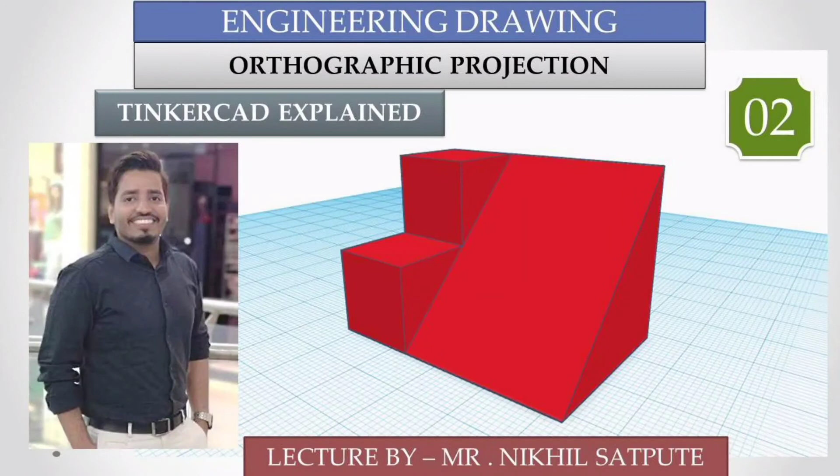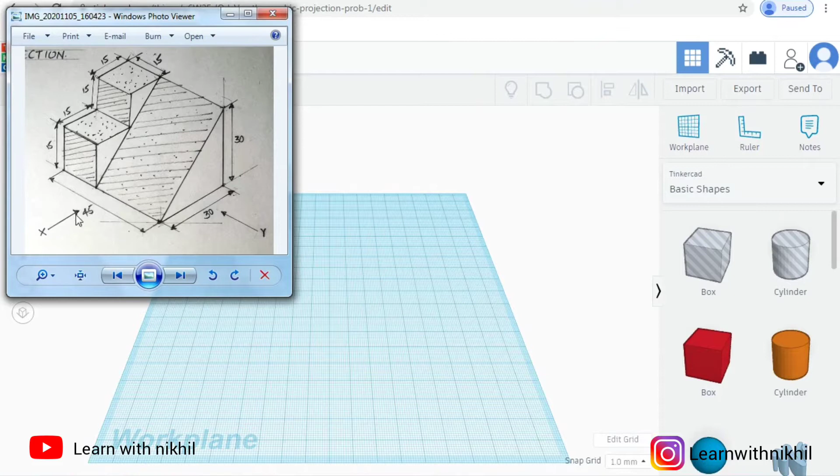Here I have taken my orthographic projection sum number 2 and explained it using Tinkercad software. So first, this is our work plane and this is the three-dimensional diagram which I'll explain you how to draw using Tinkercad software. So first we have to look at its base, width and height.

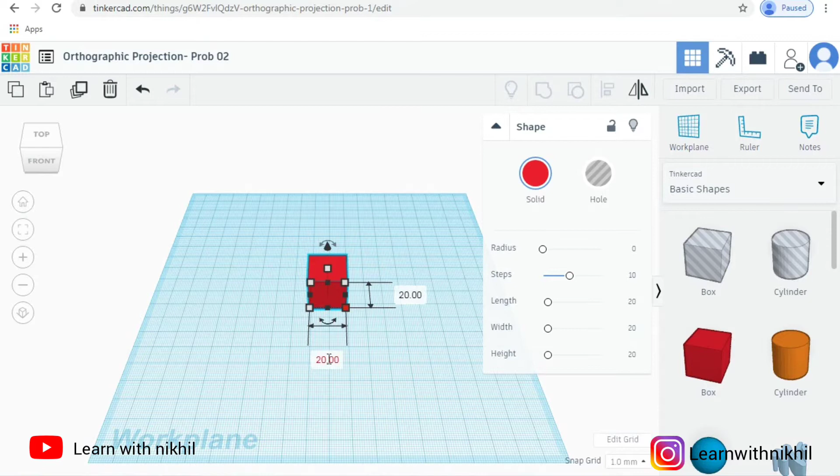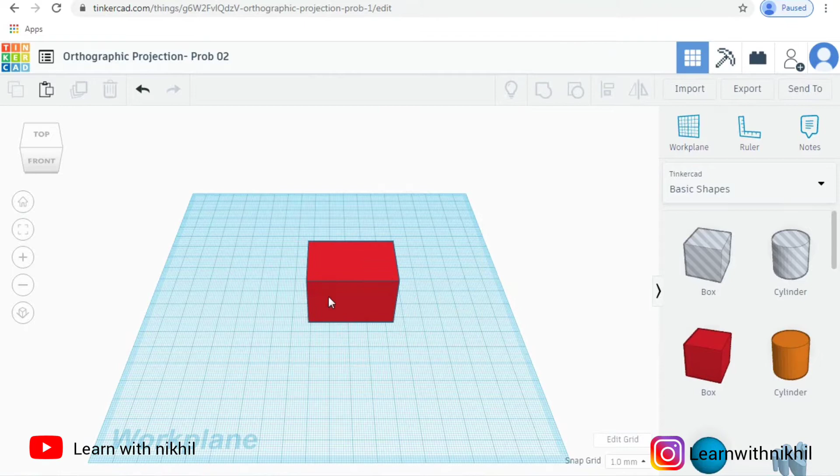So first we will consider this three-dimensional cube or box, and with the dimensions you can see the x direction front view. Width is 45, depth is 30 and height is 30. So with these dimensions, first we have drawn the box with the given dimensions in the question, that is 45, 30 and 30. So this is a rectangular box, which we have made using this Tinkercad software.

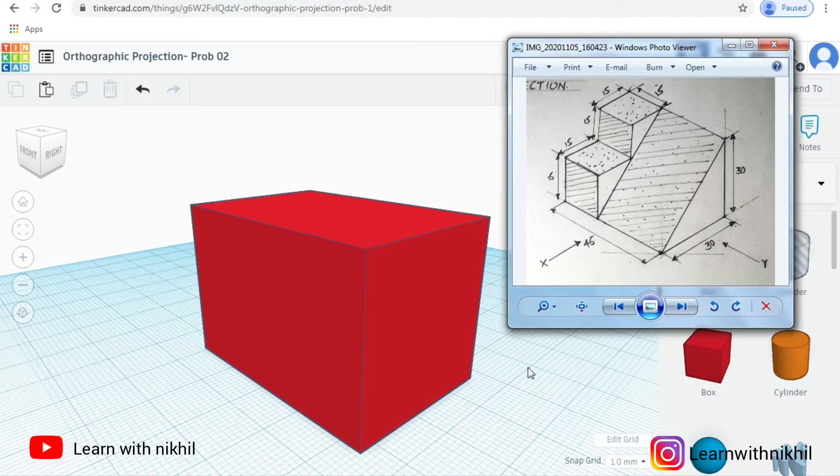Now as you can see, this part is sliced. So we have to cut it diagonally from this part. You can use a triangular shape or you can use a box with double the dimensions. If you are using the triangular, base should be diagonal, but here I am considering the box. This box is a hole shape box, not a solid box. You can convert any shape into a hole shape by clicking on this hole option.

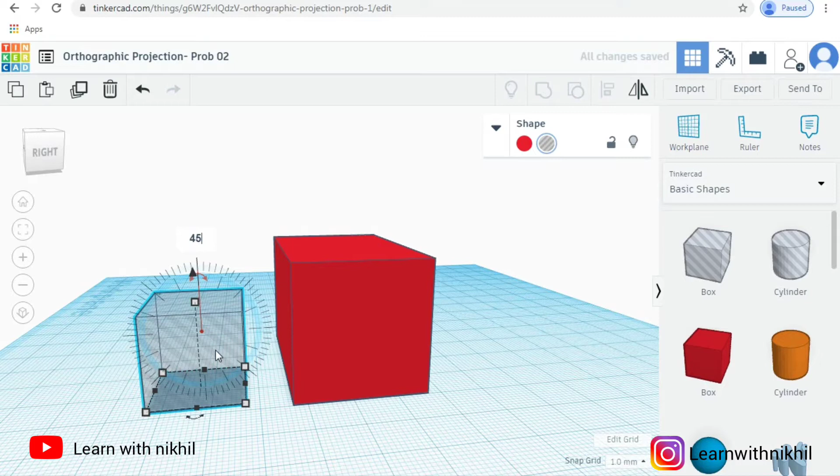I have considered this box. I'll just rotate it at an angle of 45 degree. So clicking on this arrow part, I'll write it here 45, so it will shift to 45 degree angle. Now I'll just increase the dimensions of this box. As the length and height of this box is 30-30, I'll make it double, 60 and 60, so its diagonals will be properly aligned.

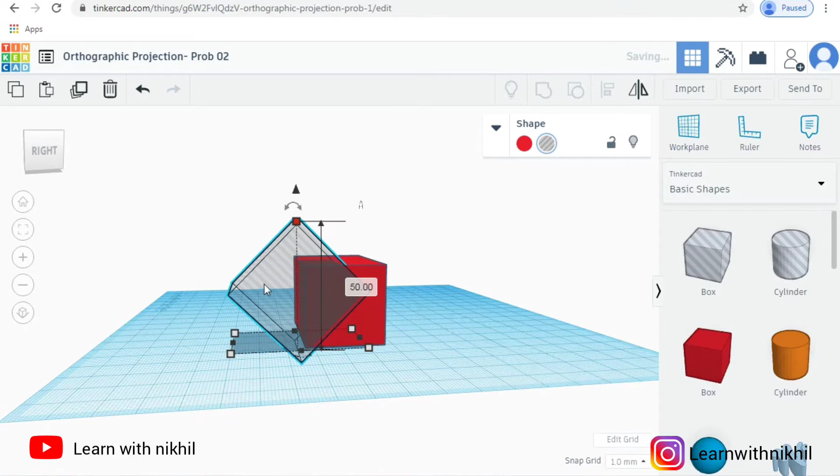Thickness is 30, so that I'll keep as it, and the height and width I'll make it 60, that is double. First you can see I've made it 50, later on I'll make it 60 to perfectly align the diagonal. So this is 30, so I've made the height as 60 of this whole box.

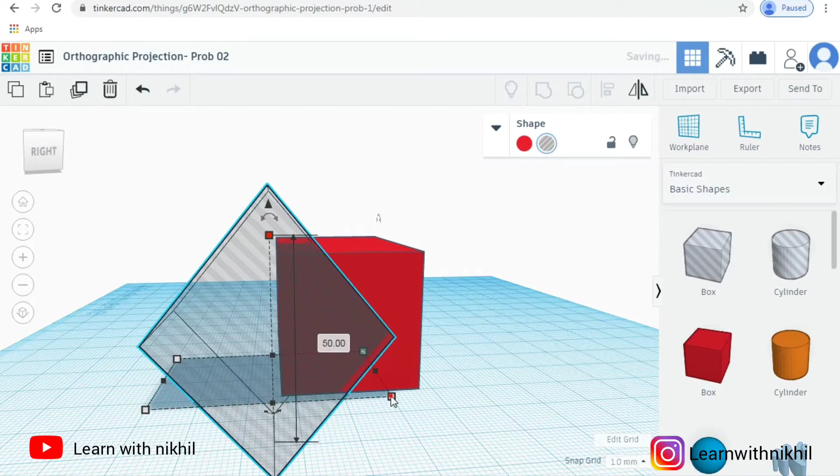So making this 60, and also the depth will be 60, and the width I've kept it 30 as we have to cut it in that 30 plane. Now just aligning this on the diagonal. Now we don't want this diagonal part to be sliced. As you can see in the image, it is the other way. I'm just showing, if you want to slice the part in this shape, you can do it like this.

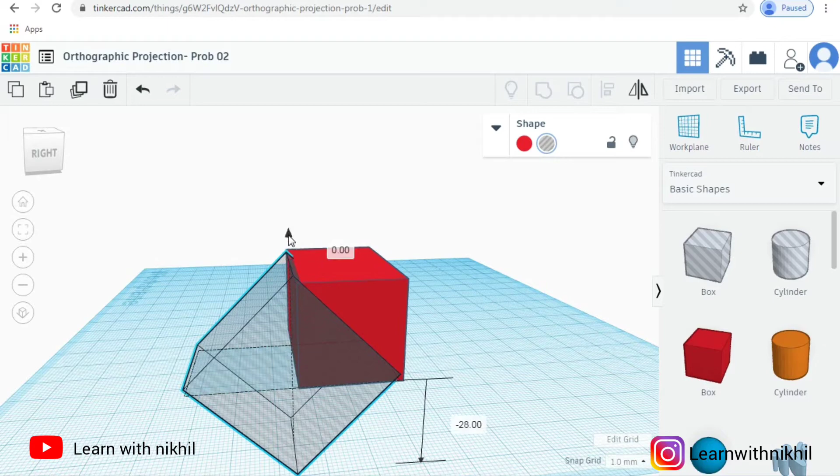Now I have pressed Control A, selected both the shapes and aligned them on the extreme right. You can align them using the align option. Now as I want to slice it the other way, I'll just move this box upwards. By holding this dark triangle, we can move the shape upwards or downwards. Now I've aligned it properly diagonally the way we want to cut the shape.

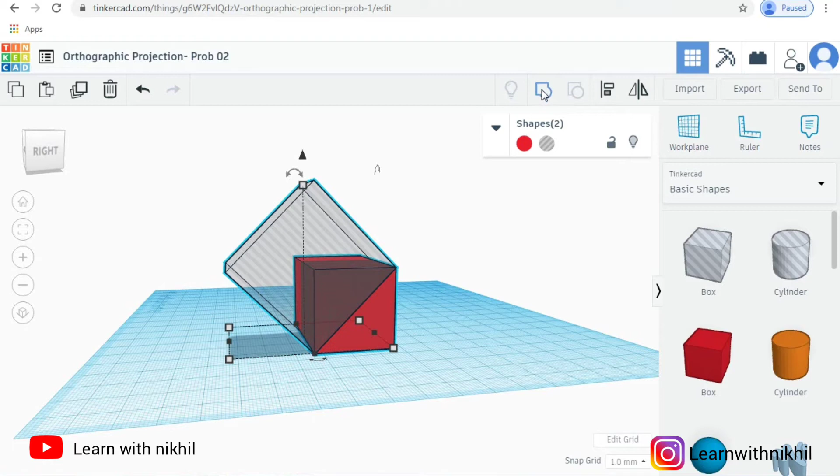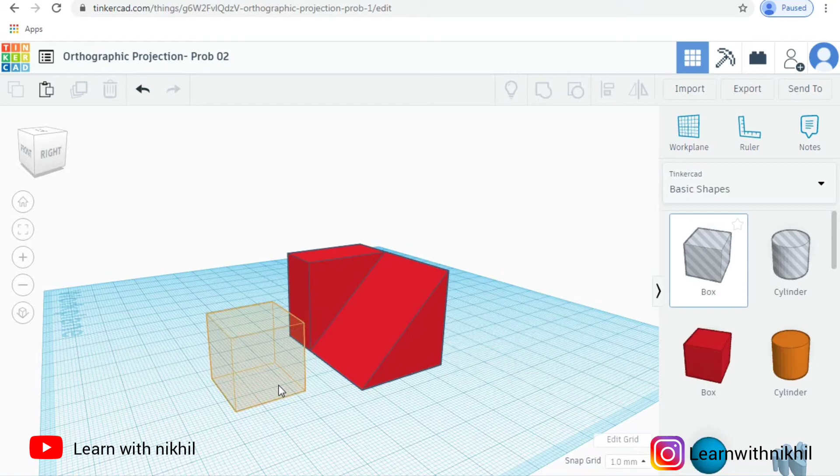So I have selected both the shapes using Ctrl A, and grouping cuts this part. As you can see, this part is cut. Now next, again we have to cut this part. So I am again considering the box with all the sides 15. So making it depth 15, height 15 and width 15. So it is a cube with all the sides of 15.

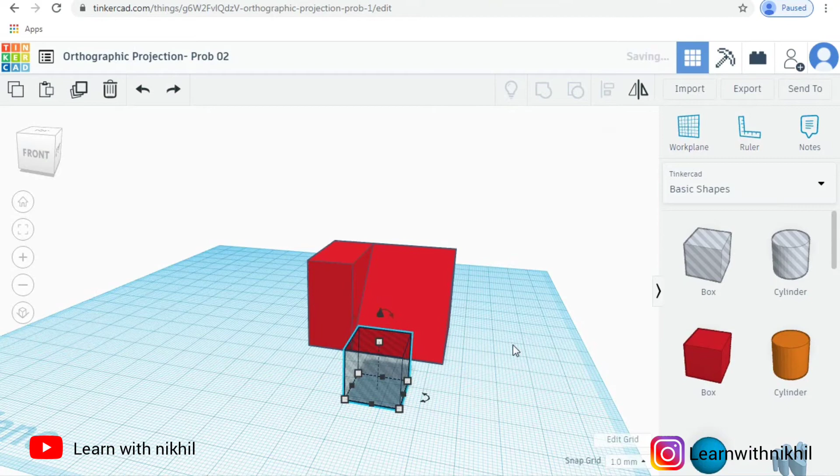Now placing this on the top side of this box. Ctrl A, I'll select both of them and align this box on the top side, or you can move this box above the height 15. For better fit, you can align this. So Ctrl A, then this is the align option. Clicking this part will align it to the extreme left, and this will bring it front. So this box has been totally aligned at the top front side.

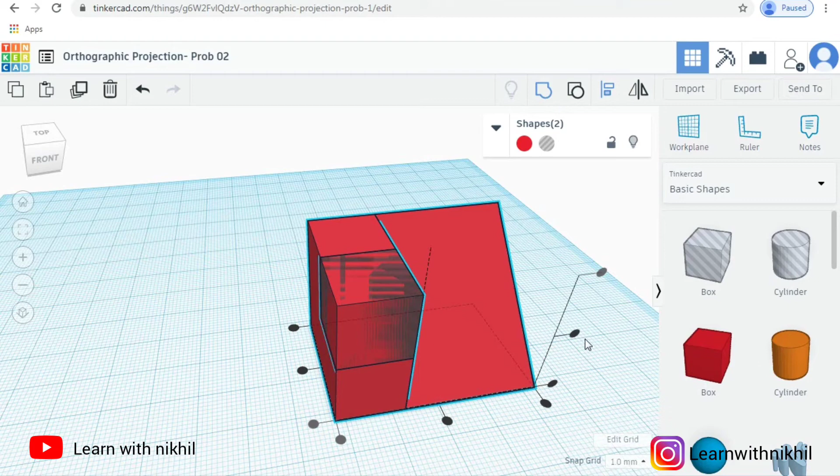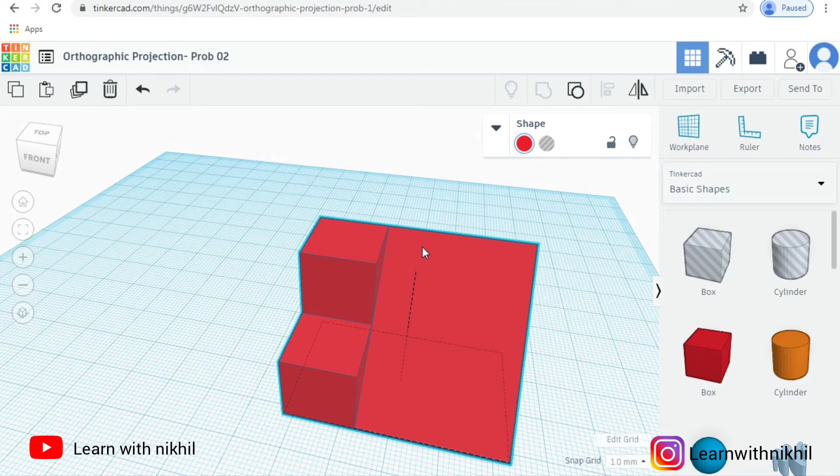Now selecting all and grouping them will cut the shape of a box. So I have selected both and now we have grouped them. So this shape has been cut out and we have done with our three-dimensional orthographic image, with the dimensions which have been mentioned. Front view, side view and the top view, I'll show you.

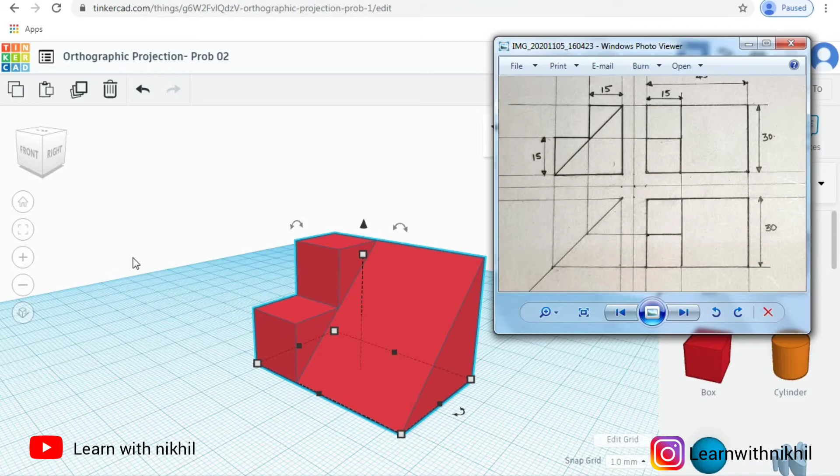So this is the front view. Now switching this to the orthographic flat view, which will show you the perfect front view. I have clicked on the front and you can see this is the front view. Two boxes with width 15, height 15, and this right box is clearly seen. So these two boxes and this box are visible from the front view.

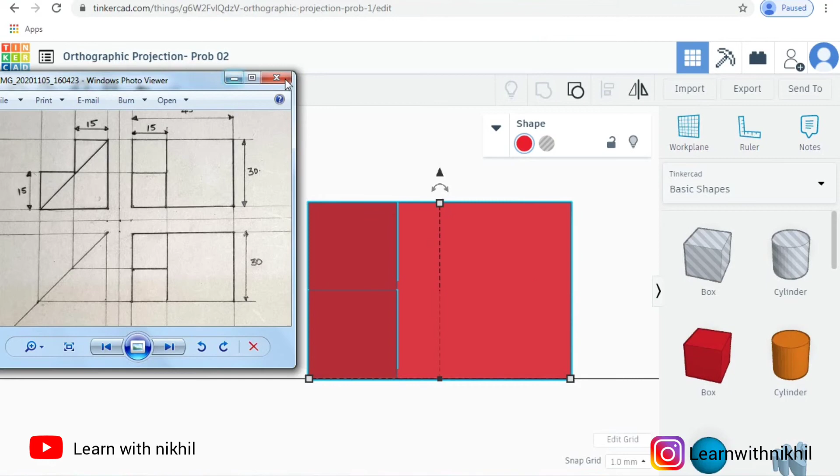Now moving towards the top view, I'll just pull this part downwards. So this is our top view, just aligning it straight. Using the right click of the mouse, you can move this work plane. So this is the top view, these two boxes of width and height 15.

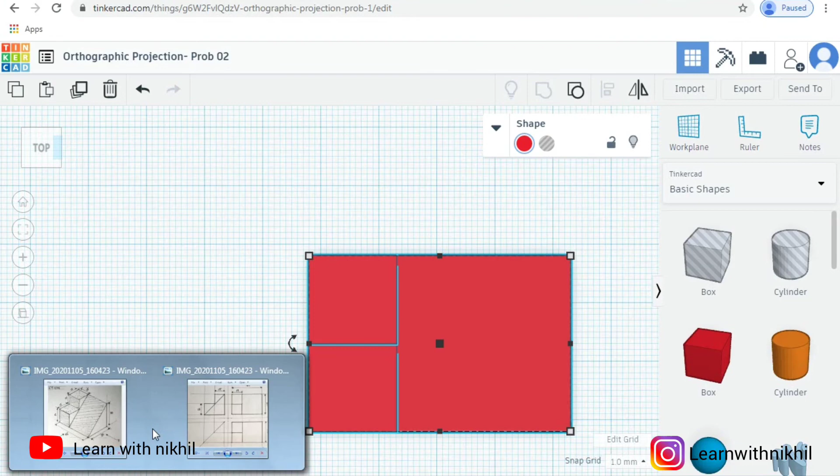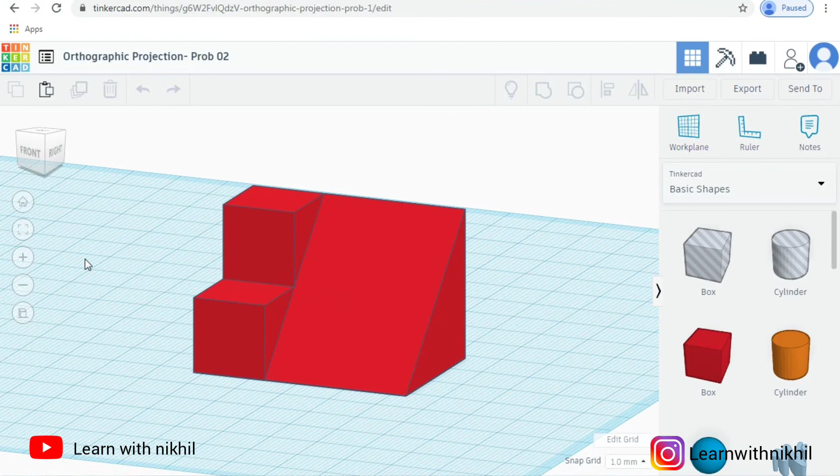Now moving to the left hand side view and the right hand side view. In the question we have been asked the right hand side view. This is the left hand side view; you can draw it if asked in the exam. So I'll just rotate it the other way. See the difference. Clicking on the right will give me the exact right hand side view. This was our question.